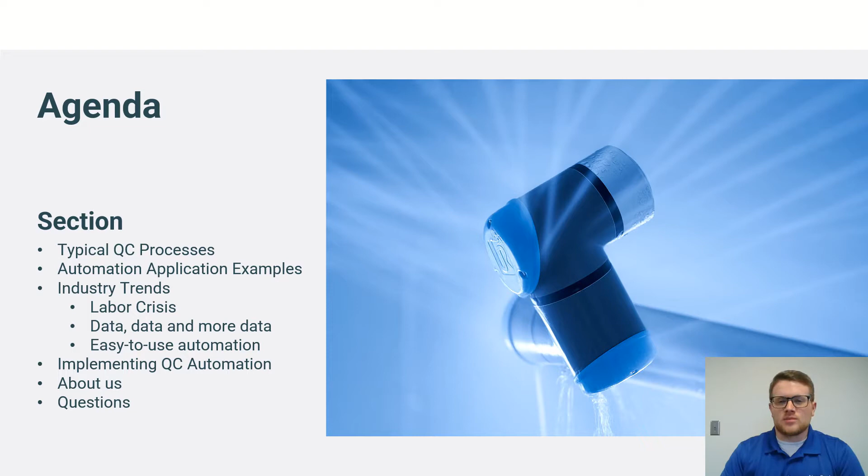So many manufacturers tend to lump quality control, which is a really critical business function, into overhead costs, and it's not often considered a starting point for automation, even though QC is full of these expensive, labor-intensive, manual, boring, and repetitive tasks that are really great candidates for automation.

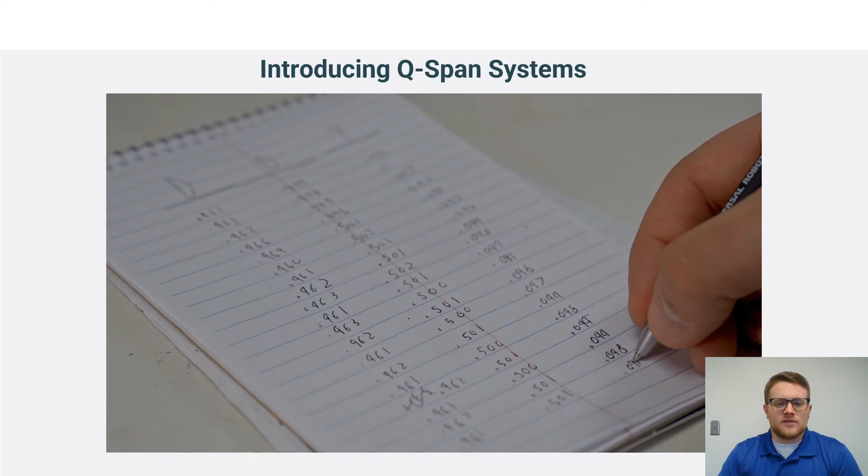Inspectors, and especially CMM programmers, are often paid much higher than many other production staff on most quality teams. And while manual tools are great for quickly checking dimensions in reference to a drawing, using them for hours on end is prone to error, could even cause repetitive stress injuries, and definitely leads to turnover because employees just don't want to sit at a bench doing this all day long.

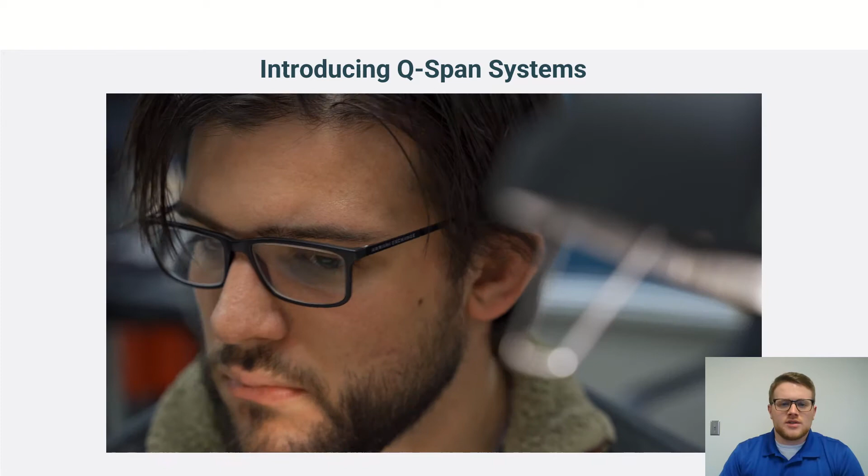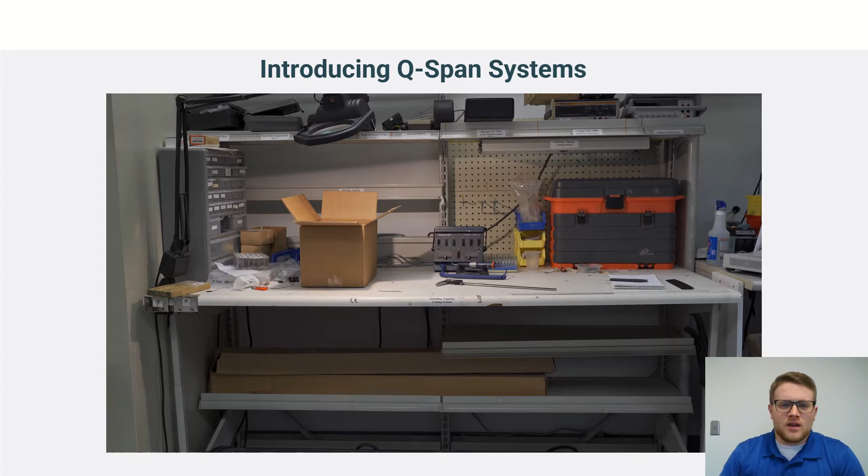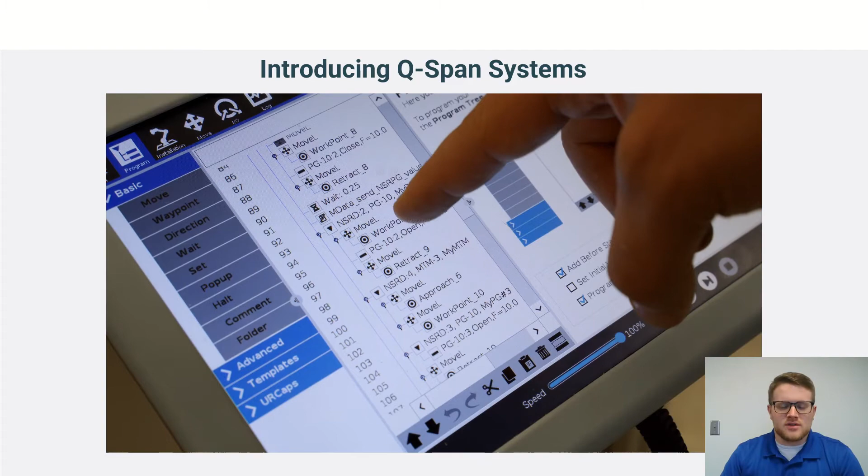So our goal was really to enable QC automation at roughly the same speed as a human operator, take up the same amount of space that a person would need to manually inspect at a bench, and eliminate data collection errors. This also helps free skilled operators to do more productive QC tasks, like more intricate and complicated inspections, maybe something like programming a CMM, or a visual-based inspection system that you might have in the metrology lab.

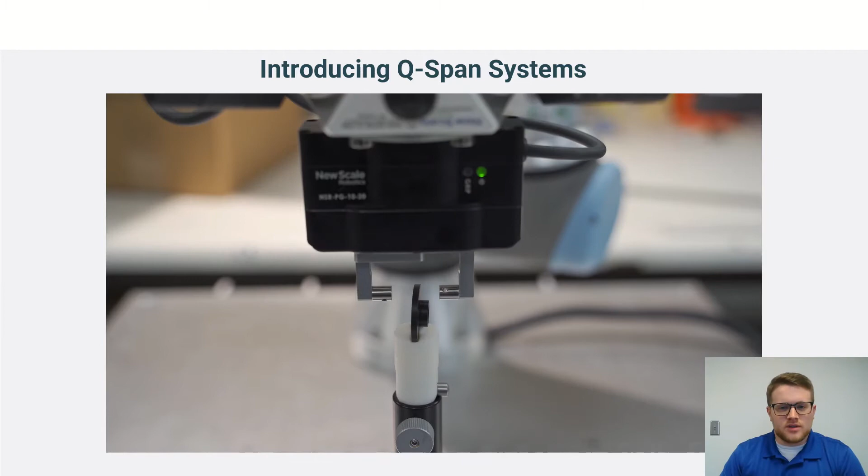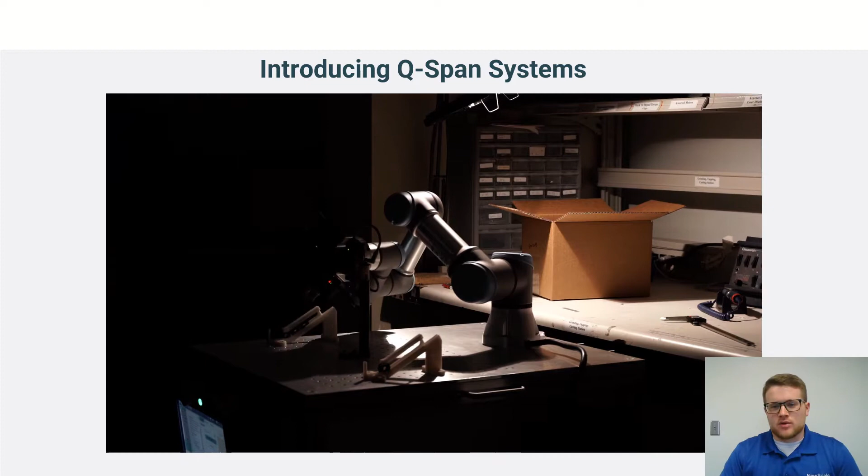The Q-Span workstation is what you'll see throughout this presentation. It uses grippers that function as robotic calipers to allow you to not just pick and place parts, but you can pick, measure, record, and place parts, allowing you to automate the type of repetitive inspection processes that we're showing in this video on screen.

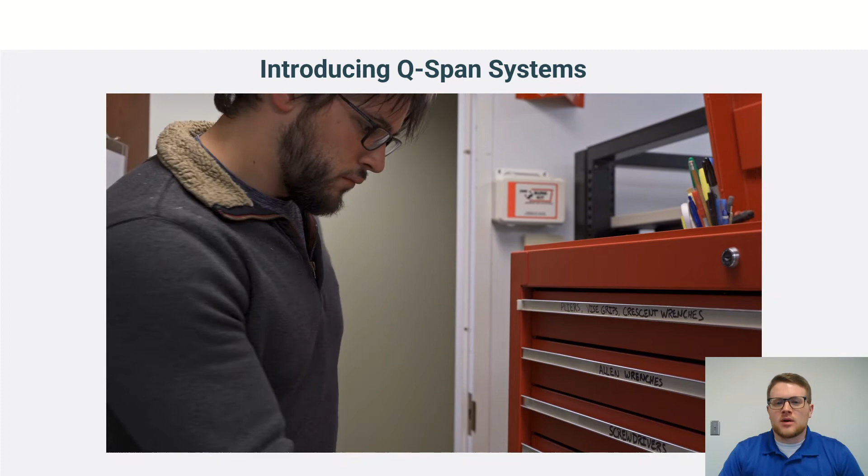During assembly processes, operators need high-quality in-spec parts to ensure that assembled parts meet mechanical fit and performance requirements. Out-of-spec parts can negatively impact your tolerance stack-up and, in turn, your assembly yields. So automating inspection and part sorting with the robot before assembly begins allows your operators to work with binned parts with known dimensions to improve assembly yield and quality, and we'll talk about that a bit more later on.

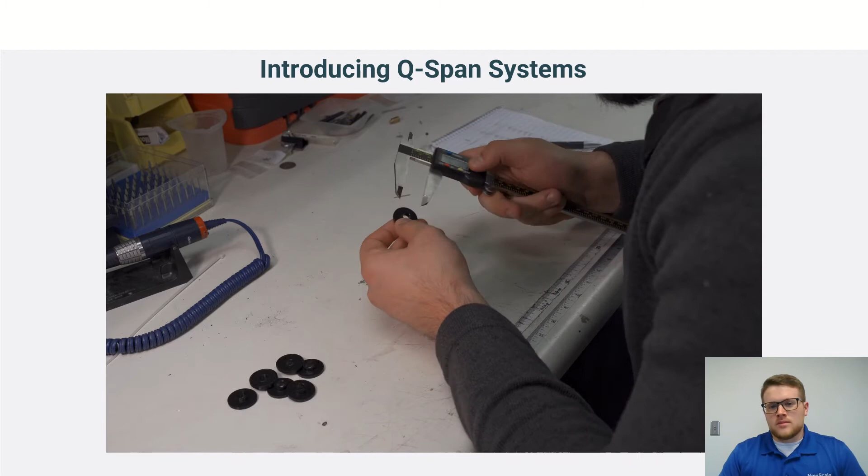The gripper's repeatability is about 2 times better than most digital calipers, and we're removing the human variation that you see from multiple operators measuring parts manually with those handheld tools.

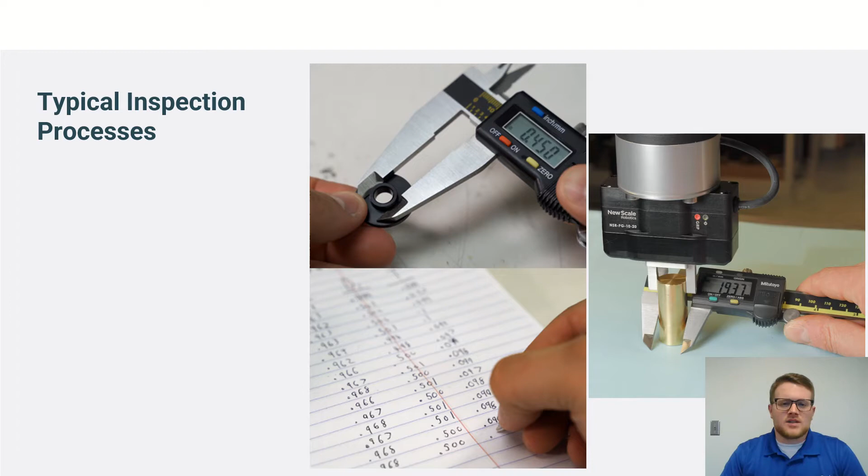Every production process needs to have some sort of quality process in place as well, because if you can't measure your process, you can't improve it, which is why the QC department is so necessary.

And traditionally, when we're inspecting and collecting dimensional data on parts, you really have 2 primary methods that you see in most production facilities. Method 1 is the parts are measured on the floor by an operator or inspector with manual tools, and this data can be recorded manually or recorded with a direct connection to your SPC software.

It's a really good way to check critical dimensions to verify that the process is producing in-spec parts, but having to use a tool for hours on end is, again, prone to error and perhaps high turnover.

Every operator measures the part somewhat differently with manual tools, and that's why you use multiple operators during a gauge R&R study. They might apply different levels of force with their hand while using the manual tool. They may grip the part in a different location or at a different angle than another operator, or they might just record the data wrong. They might have rounded incorrectly, they may have bad handwriting, or they might have just been distracted or tired.

Throughout a production day, operators are often asked to sample parts from a process, something that can often be overlooked or forgotten, or maybe even skipped entirely, as operators are required to adapt to new challenges or tasks on the production floor. These inaccurate measurements from manual tools or forgetful operators who may accidentally allow the machine to run for prolonged periods without making process adjustments can lead to failing batches of junk parts that need to be reworked or scrapped entirely, both of which are unnecessary production expenses.

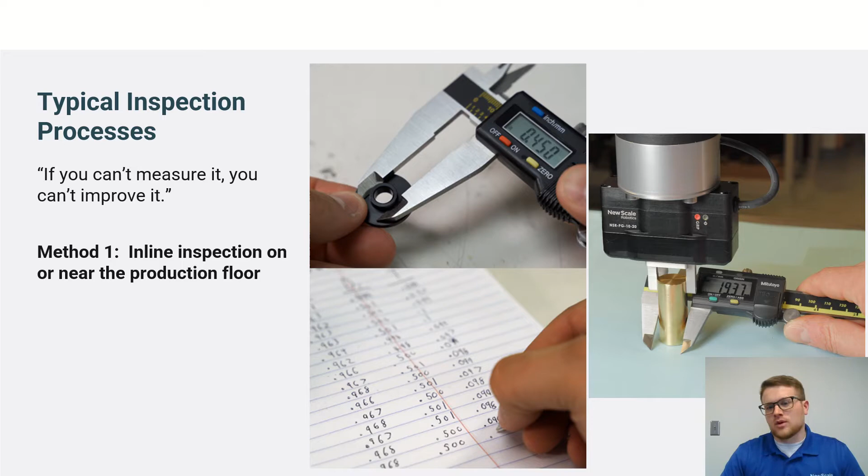This type of inspection work usually involves loading parts in and out of pre-programmed inspection cycles on these machines, which is often a boring, time-consuming, and expensive operation, falling nicely into the dull category and really making it an ideal candidate for automation.

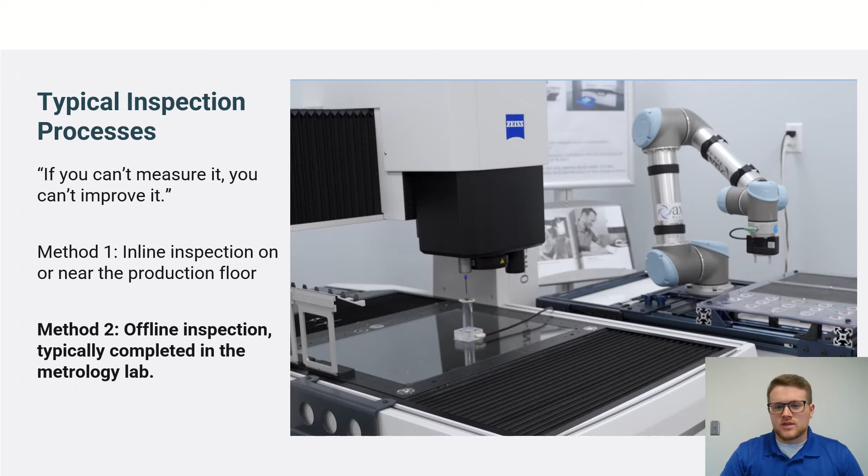These routine inspections are often performed by highly trained and well-paid inspection technicians who have considerable training time on these more advanced inspection tools, and whose time is not best spent just loading parts in and out of a machine all day, especially in an environment where manufacturers are facing a labor crisis with many open positions for skilled manufacturing staff, including quality inspectors.

Let's take a look at some real-world application examples and why QC automation is growing in importance within the marketplace.

Companies like NewScale Robotics are developing technologies that can be used to automate inline inspection, like our gripper caliper. Operators would be expected to periodically check measured dimensions to verify that parts are being produced within tolerance. So why shouldn't your cobot have this requirement as well?

Inspection is one of the most critical tasks to automate if your goal is to have a fully automated cell, especially one that can run lights out and continuously produce good parts without an operator having to tend to the QC functions of that machine.

Periodically inspecting the dimensions on parts to verify that they're being produced within tolerance helps machinists determine whether the process is performing correctly. This dimensional inspection data can really reliably provide insights into different process changes, and for example, this can indicate whether or not tooling on a machine has begun to wear based on the measured dimension.

This will require the operator to stop the process temporarily to adjust an offset, or perhaps even swap out a machine tool. I speak with a lot of manufacturers that have implemented robots for machine tending, but find that they keep producing runs of junk parts because they haven't quite solved the QC piece of their automated fabrication.

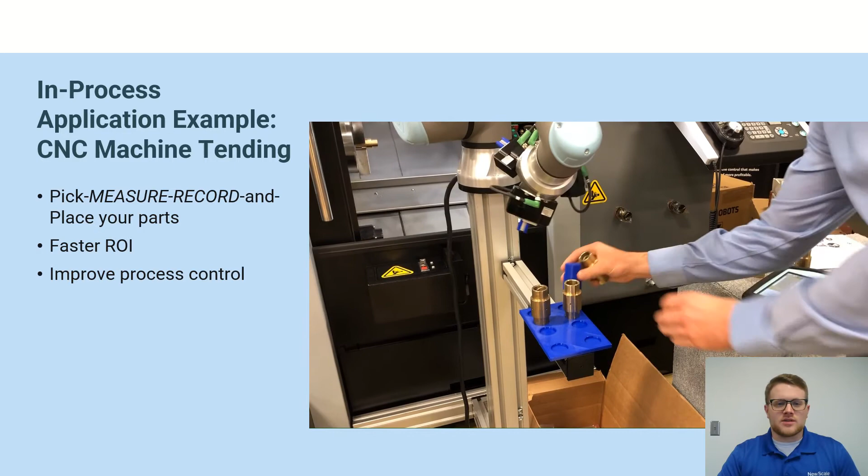Once you understand the correlation between a part tolerance's drift and the wear on a machine tool, it might also even be possible to automate those offset adjustments on your machine and enable completely lights out automation.

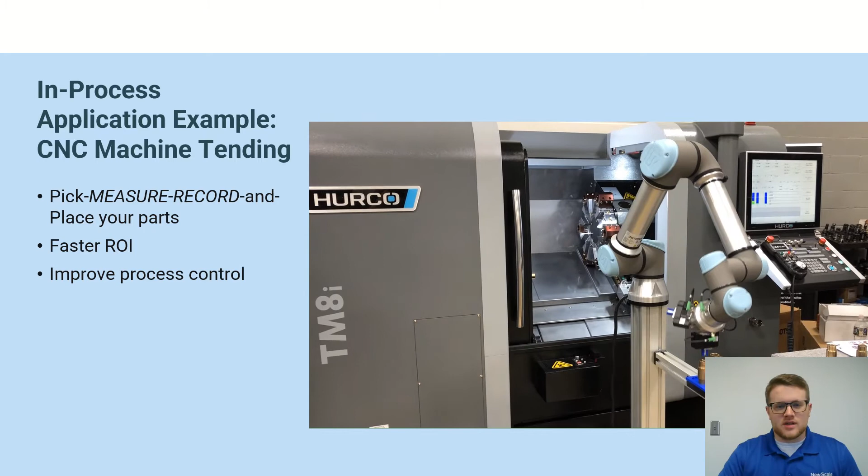This is a demo created by a UR distribution partner, ADI, where the precision gripper calipers on a UR5E pick and place parts out of this Hurco machine and place them onto an output fixture. The critical dimension here, the outside diameter, is inspected to determine if the part is within tolerance.

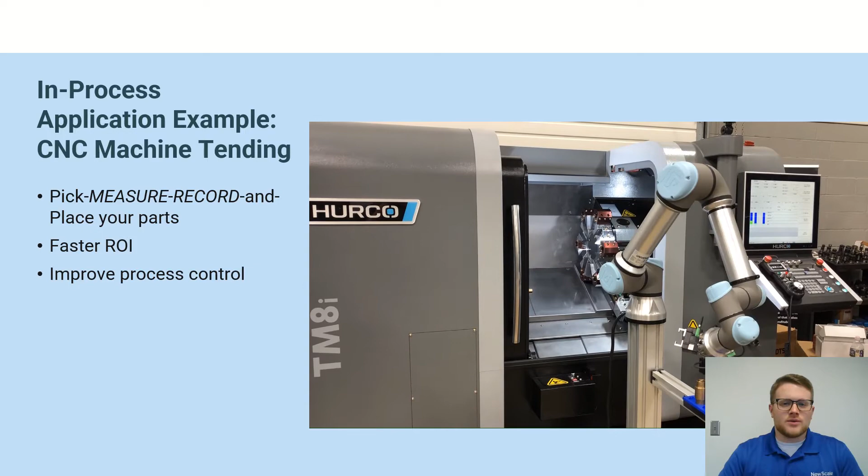Here we swapped in a 3D printed part that you just saw. It's the same exact size as that part, but it was outside of the tolerance window, so the robot made the decision in process to move the part to the fail location, in this case, into his hand.

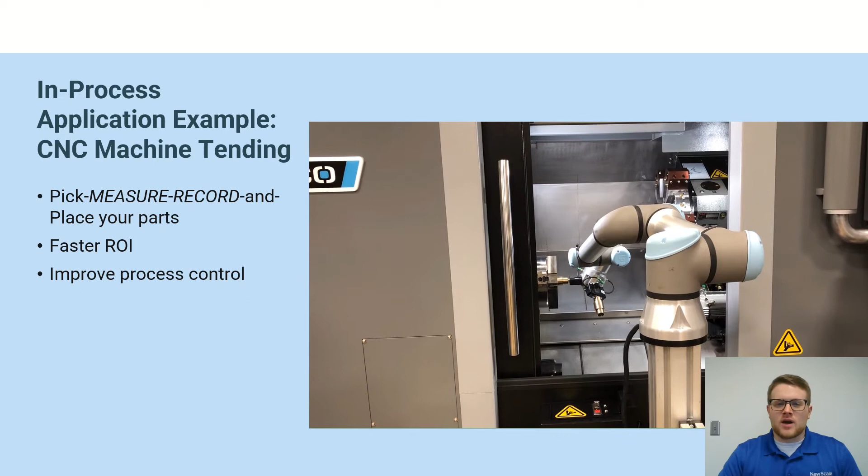This is an example of one way to use cobots for QC automation. In a production setting, the cobot could be configured to also notify an operator when a part fails and require them to inspect or perhaps service the machine before they restart it.

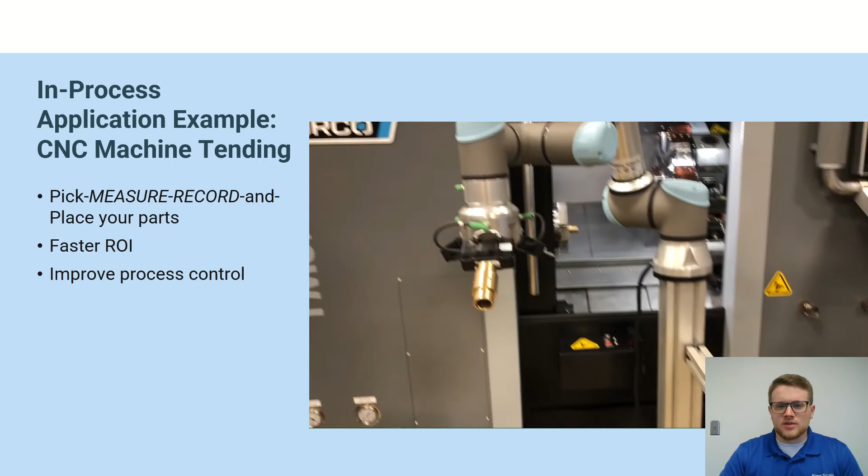In something like an injection molding setting, the same type of process can occur on molded parts to inspect some critical dimensions and help us ensure that our molds are still producing good parts.

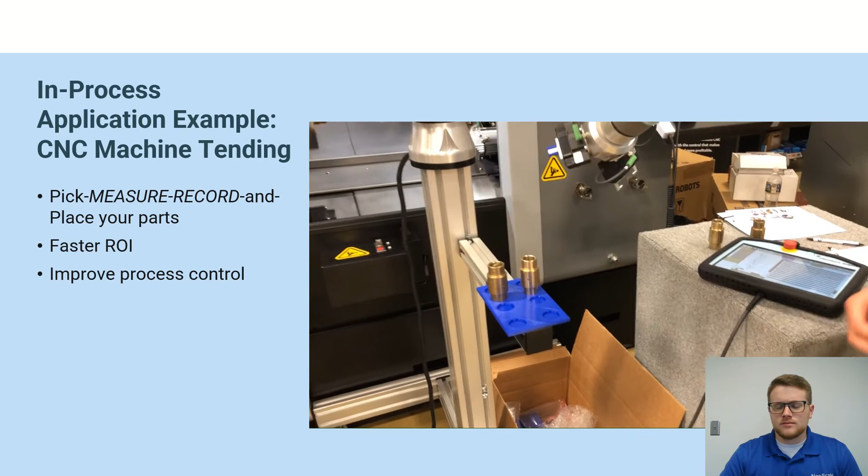In some operations where several different parts need to be assembled into a subassembly, tolerance stackups can quickly become a big problem for your yield as you try to meet your mechanical fit and performance requirements. Some assembly processes will even incorporate in-process modifications like shimming or grinding to help improve yields with the parts the operators are given. This is sometimes called a fitted assembly operation. This is not just a difficult process to control, but it also requires very skilled technicians to effectively execute and achieve your yield targets.

One way to mitigate this is by inspecting parts and placing similarly sized parts into bins. This provides operators with parts that have known dimensions within a certain tolerance window, giving them a smaller sample of parts to work with before they even start assembling. The end result is that you can improve yields by reducing the need to rework parts that don't quite fit during an assembly process.

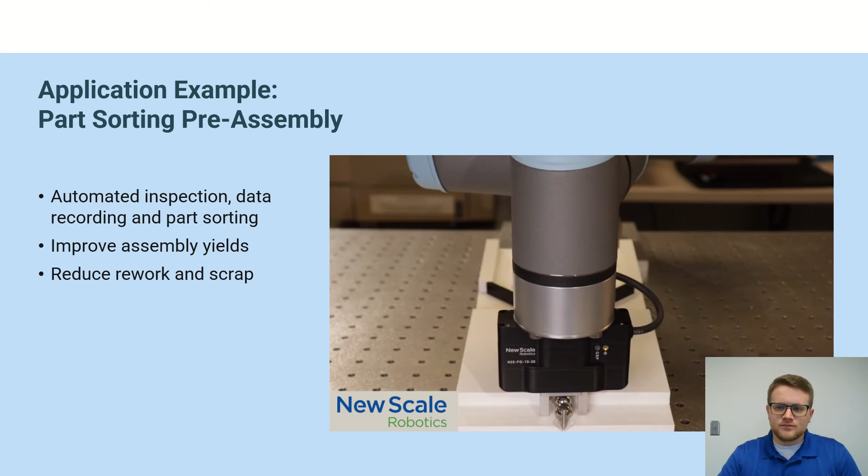In this application, our customer OptiPro Systems used a UR3E cobot with a precision gripper caliper to inspect the dimensions on a large stack of cored lens blanks. This production involves large stacks of laminated glass that are bored out, producing several batches of these lens cores at one time. That requires that an input tray be loaded into the cobot workstation, which is different than the single part feed we saw in some of the previous slides.

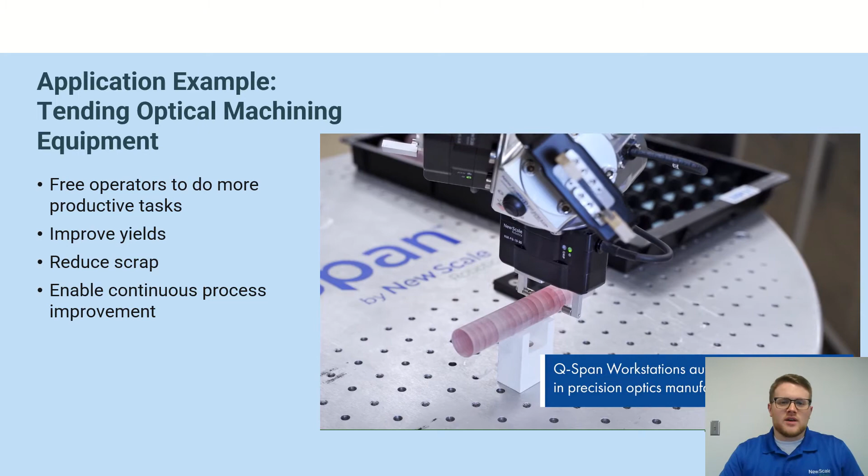Using a tray allows you to load your tray, hit play, and then walk away from the inspection system, which can really free your operators to do other tasks during the inspection cycle after a very simple input. The cobot can place these parts into fail bins or trays and will generate automatic inspection reports that can be used to improve your process on the next run, helping you improve yields, reduce scrap, and eliminate the need to have your staff stand there and inspect all those parts.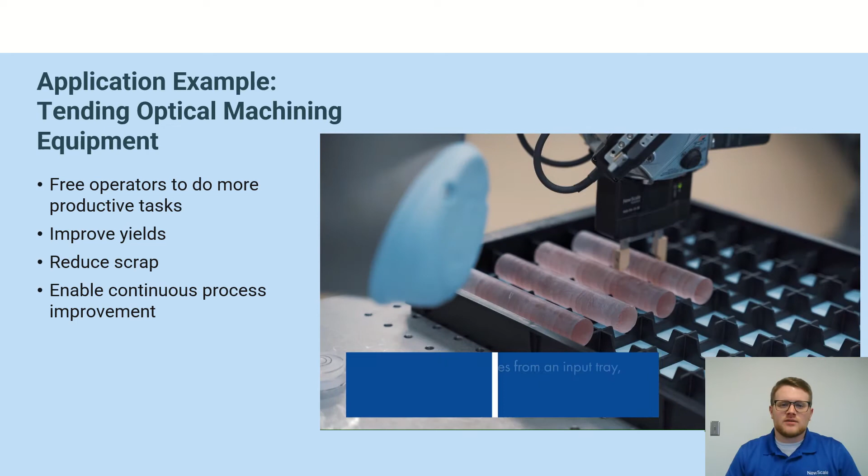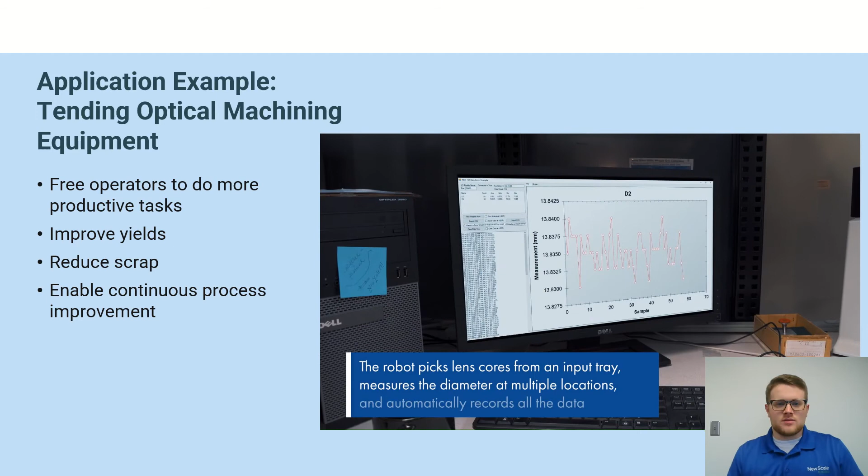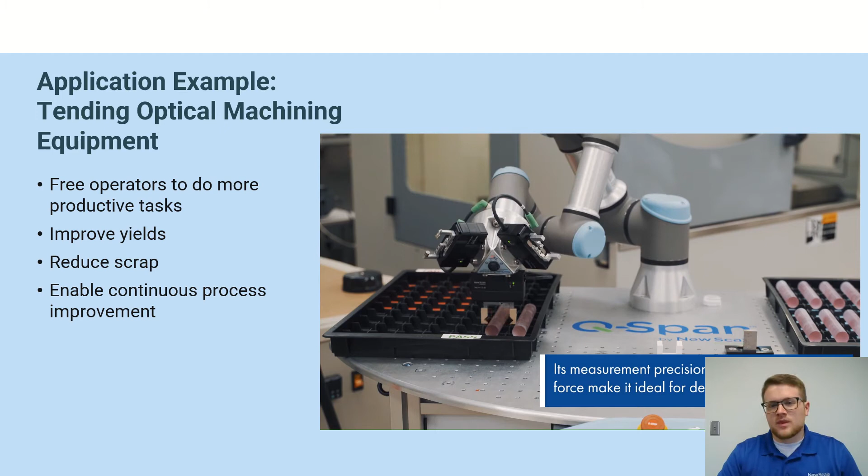During the optical fabrication process, regular quality control checks are required to ensure that parts are being cut and ground within tolerance. This can occur at early stages of the fabrication process, such as the production of these lens cores, or later in the process as those blanks are cut, ground, and polished into precision optics, some of which will end up going into lens assemblies. This can also be true for many precision metal part fabricators as well.

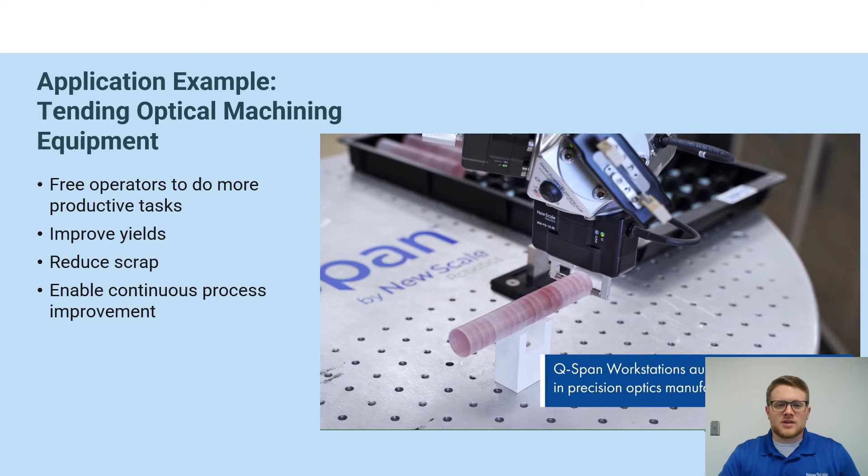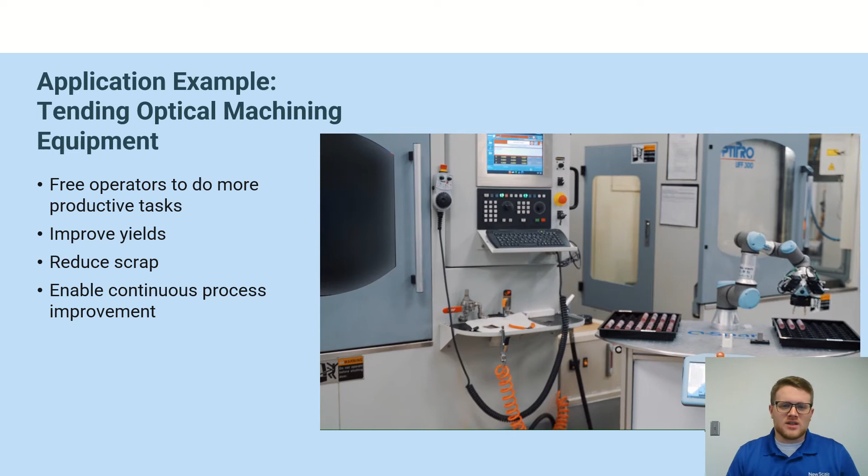The flexibility of collaborative robots allows you to load many different part types onto one workstation and inspect high mixes of parts. Once an initial inspection program is set up with a cobot, redeployment for other tasks really only takes minutes. This can empower your staff to automate any routine inspection process on your floor and handle many different batches of parts within one production shift.

Many manufacturers that we speak with are dedicating more inspection work to their quality labs to meet the industry's growing demand for stricter QC requirements and more data. This can often lead to bottlenecks within their QC labs that are really unnecessary and expensive. There's really a big opportunity cost for dedicating your valuable inspection equipment to high volume routine inspections, which can back up your entire production line.

This is an example on screen of what I would classify as a non-traditional collaborative robot application. No parts are actually being fabricated by the machine that we're working with here, but you still gain the value of freeing your CMM programmer from having to babysit this machine and load parts in and out all day long.

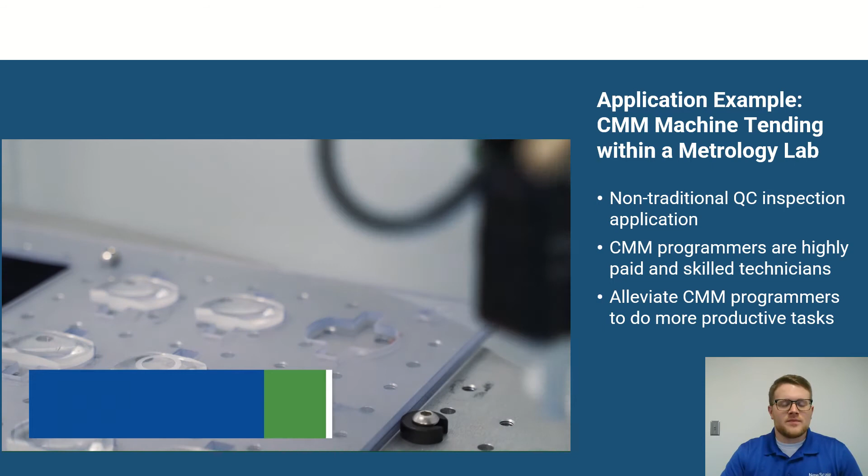It's a really expensive operation for a skilled technician that's often paid anywhere from $25 to $30 per hour. And the cost for implementing this type of application is really comparable to the annual total cost of 1 to 2 full-time CMM programmers. There's an application preview on screen, and the full video is on our website if anyone is interested in learning more about this case study.

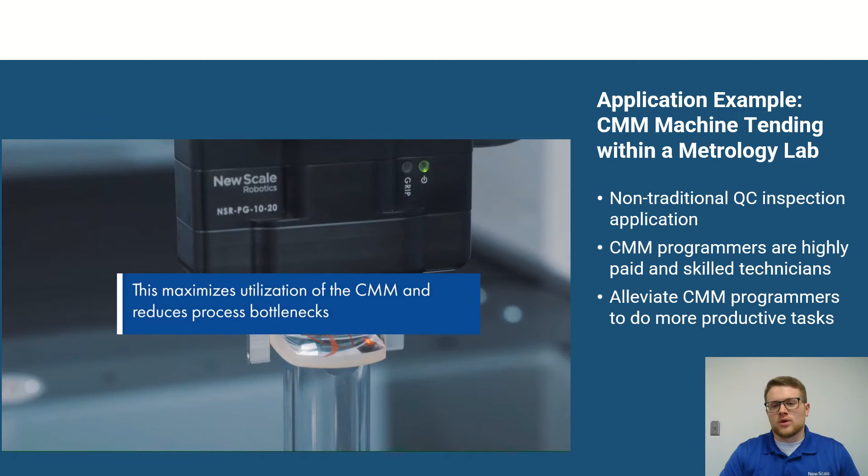In this application, our customer, OptiPro Systems, redeployed our Q-span gripper caliper to measure and perform a pre-check on the width and OD of precision optics before the lenses were loaded into the CMM. The measured dimension on the part triggers a specific CMM inspection program based on the measurement identified before loading.

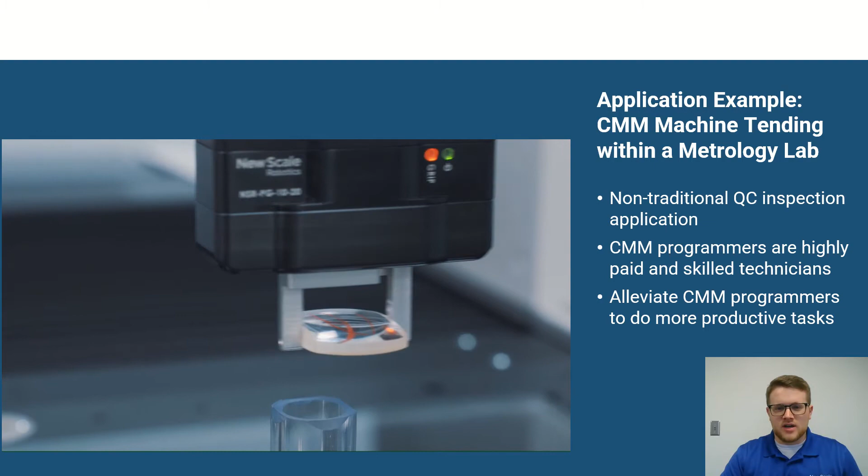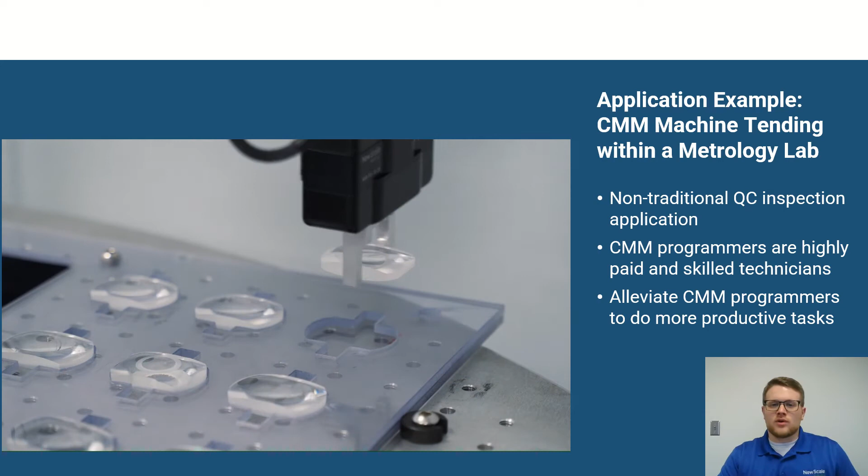For example, if we picked up a part and identified the dimension as 10 millimeters, we'd know we have part A, triggering program A to initiate on the CMM after the part is loaded. If we picked a lens with a dimension of 10.5 millimeters, we'd know we have part B, triggering program B to run on the CMM after the part is loaded into the fixture.

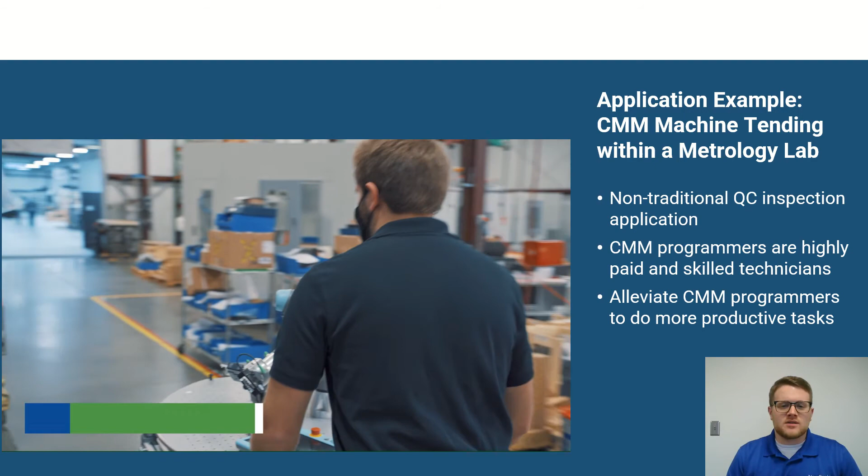You also get the added benefits of using inspection application kits for this type of process, where we can pre-inspect parts to provide cost savings and maximize the uptime of your CMM if it's acceptable to pre-fail bad parts and add in decision making to exclude them from your CMM inspection program.

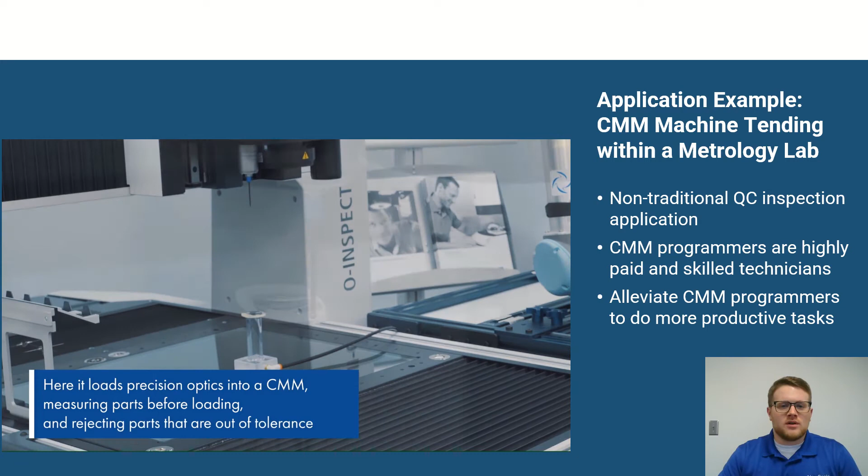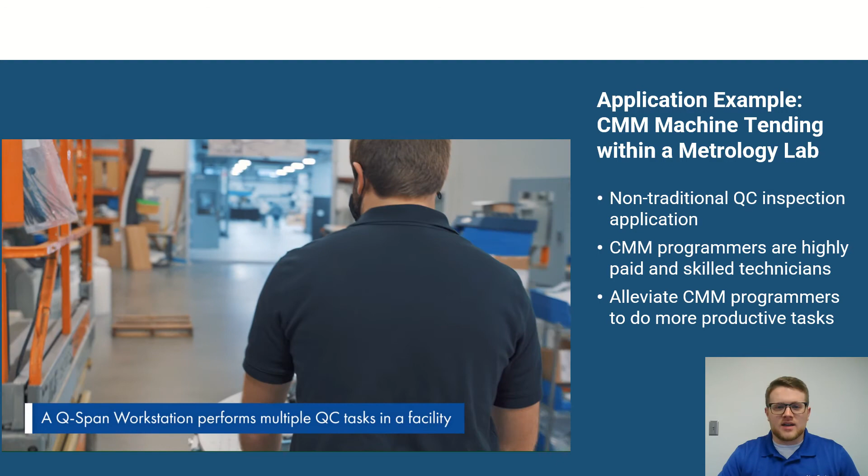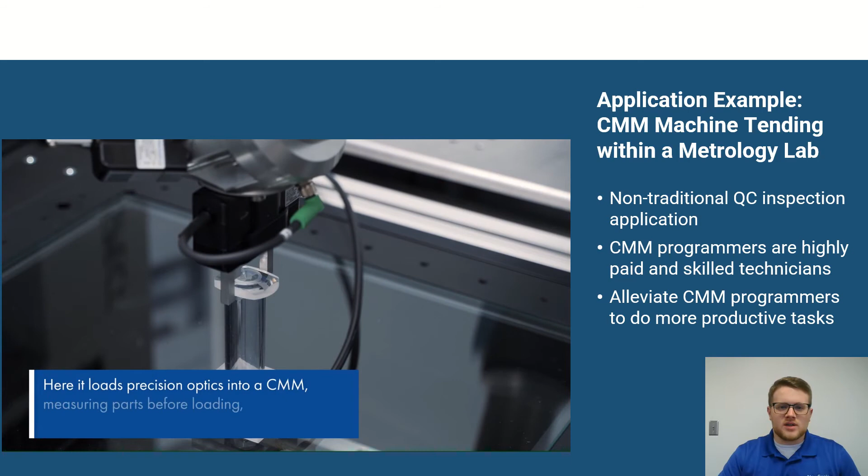For example, if it takes 5 minutes to inspect one part with a CMM, we could pre-inspect critical dimensions on the next part on deck while the CMM is running on another part. If we determine a critical dimension is failing, such as a diameter or part thickness, we can pre-fail that part and never place it into the CMM, saving 5 minutes and allowing other parts to be inspected instead.

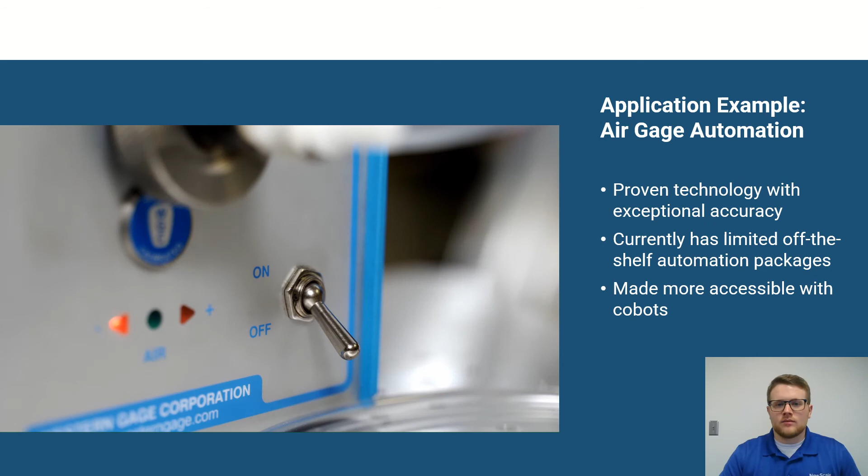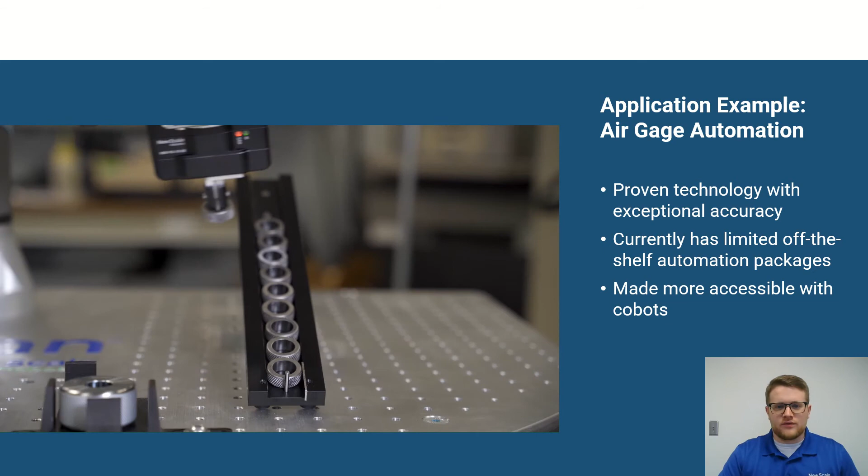Here's another non-traditional collaborative robot QC inspection application. This video shows how a cobot can automate air gauge measurements. Air gauges are an extremely accurate and reliable technology for making fast part measurements with micro-inch precision.

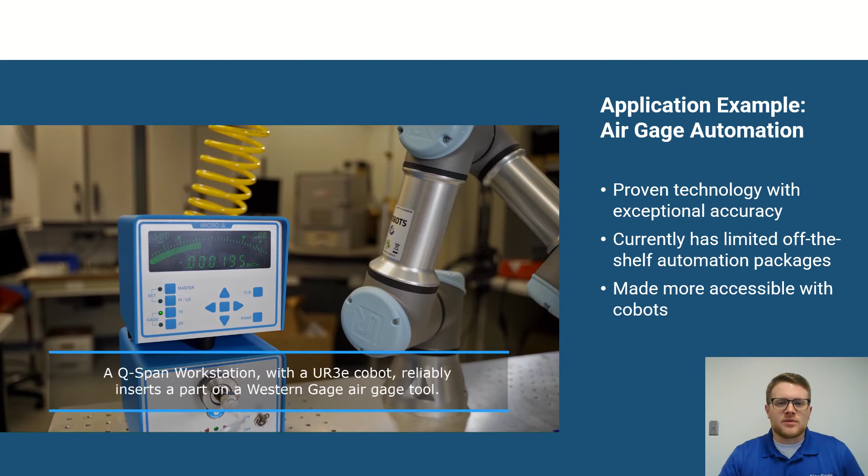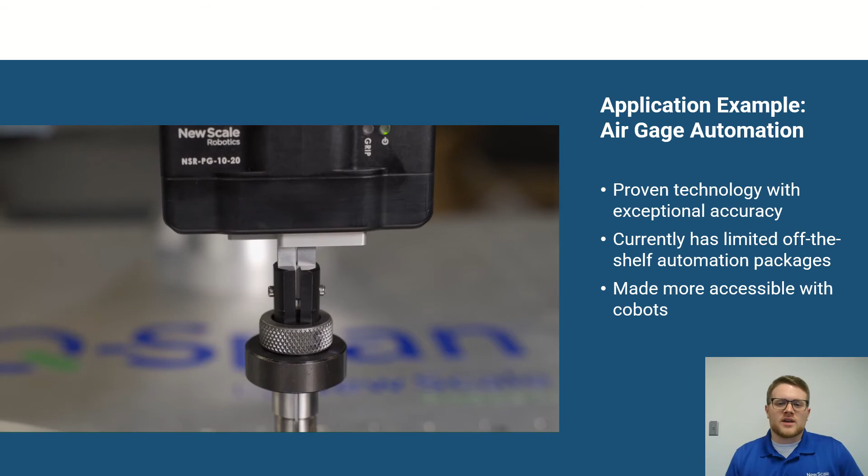Many of you supporting industries like aerospace, automotive, or medical customers are likely familiar with this type of technology and its high-end capabilities. They generally require part loading with very tight clearances, and this video demonstrates how an older technology like air gauges can really benefit from the automation capabilities of collaborative robots.

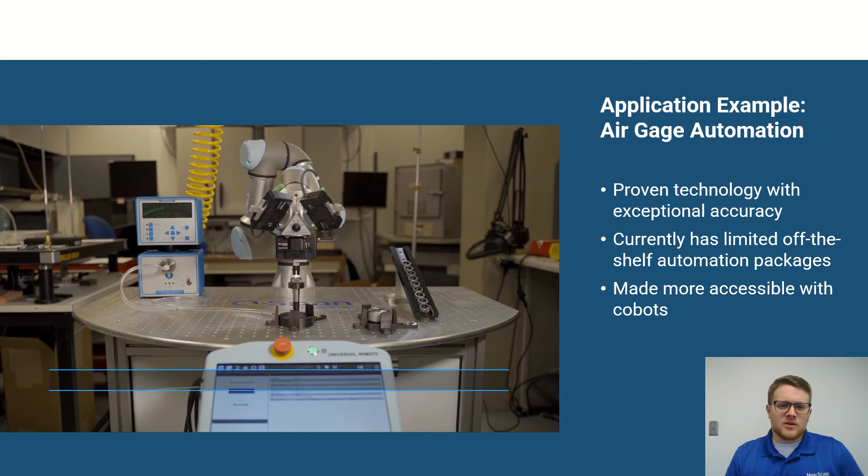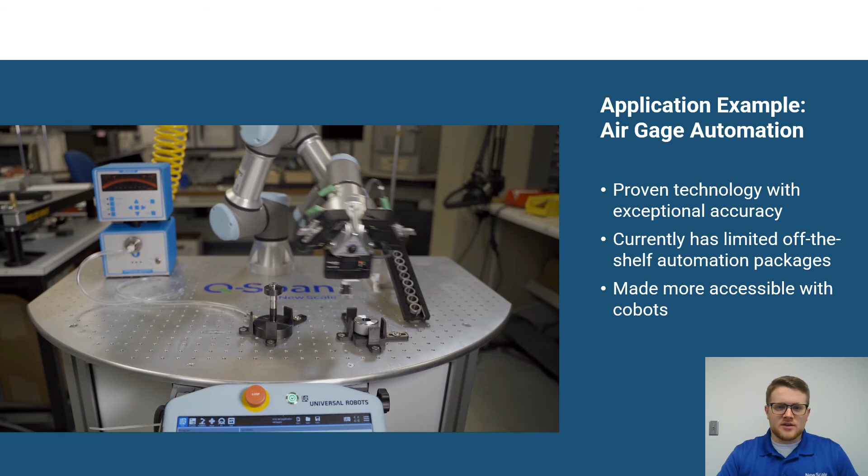This application demonstrates how the Q-span gripper caliper can work in tandem with other machines to automate part picking and placement with inspection to meet extreme high precision inspection requirements. New technologies also offer the ability to communicate with air gauges to extract all the measurement values and catalog them for analysis by our QC team, allowing for better traceability and accuracy of data collection.

So why is all this important, and how does it relate to industry trends we're seeing in manufacturing? We'll talk about a few trends and current challenges in manufacturing. Most of these challenges and trends are really interrelated, and I think they're all important to think about. The first trend is the labor crisis and the lack of available labor in manufacturing.

I'm sure many of you have experienced the impact from the labor crisis and the challenges associated with attracting and retaining staff, which for many manufacturers has been compounded by the COVID pandemic. Many manufacturers actually cite this as their number one business priority as they move forward over the next several years.

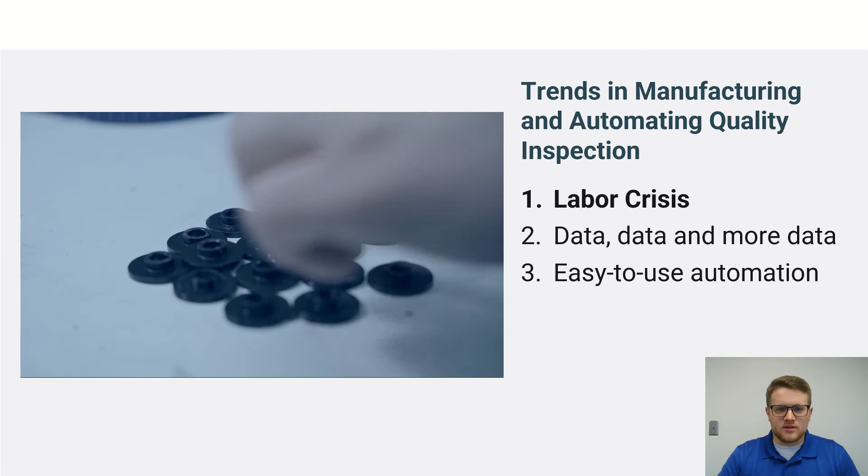There's a lot of data on these trends, and with an aging workforce, manufacturers are losing a large knowledge base as skilled employees with 40 plus years of experience are retiring faster than new employees are entering the workforce. As I mentioned earlier, QC is often not considered a starting point for automation, even though it's full of repetitive tasks that are great candidates for it.

Labor is often the biggest overhead cost in a quality department, and why is that? It's really because quality is a critical function within an organization, and you need skilled and highly trained operators to help you do the job well.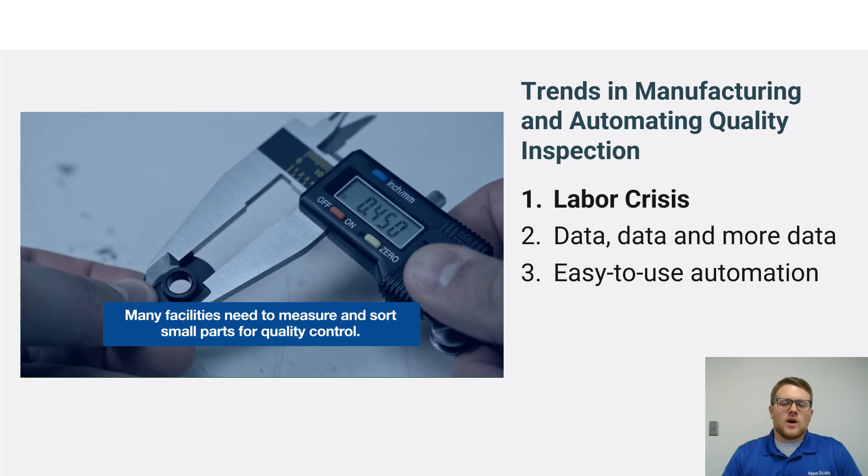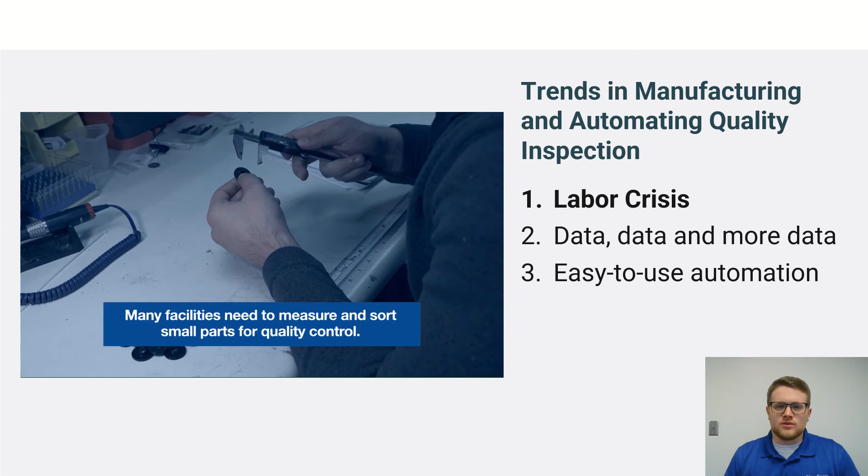Most QC processes are also manual, which further leads to those high overhead costs. In quality departments, CMM and other skilled QC programmers are often in short supply for many quality departments and metrology labs, so a lot of manufacturers hope to automate functions of their job to maximize their time programming and optimizing inspection processes.

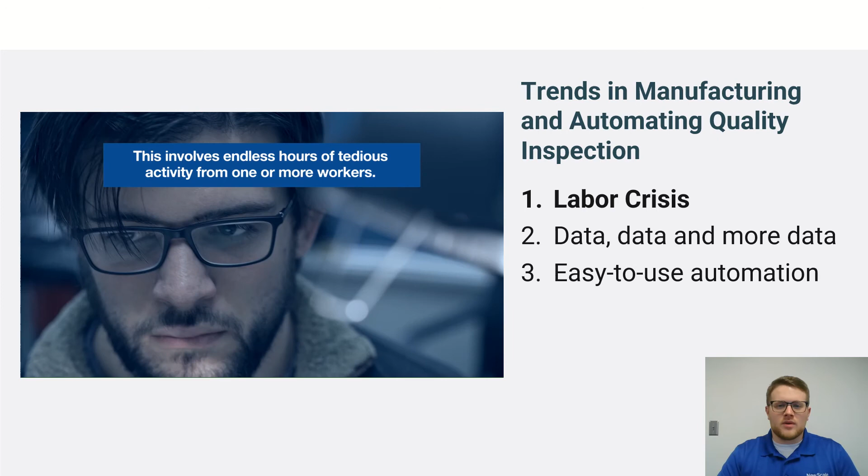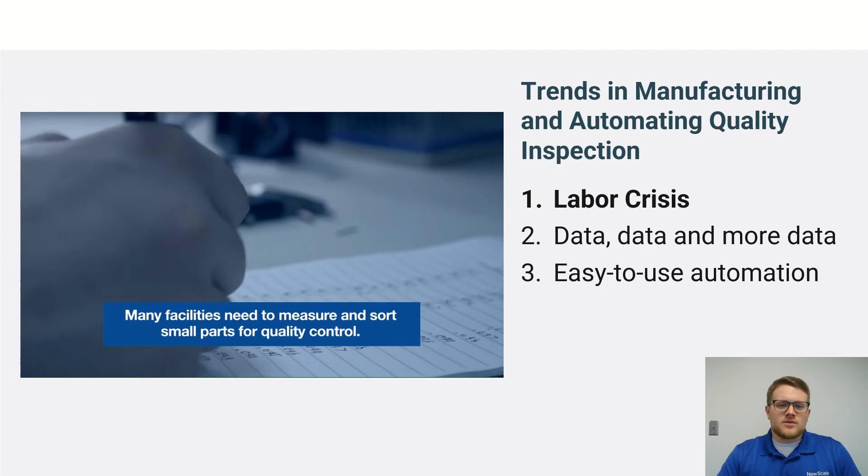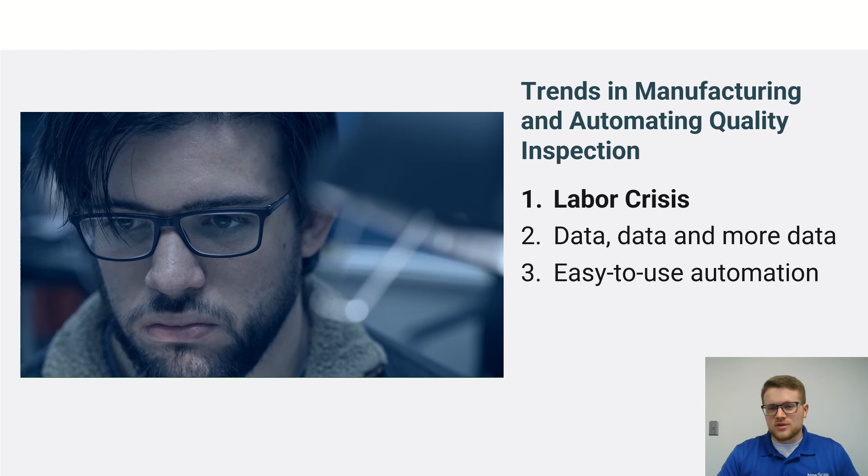On the production floor, manual inspectors are often hard to come by and/or hard to retain for the often dull and repetitive tasks of measuring baskets or boxes of parts day in and day out. I speak with many manufacturers that solely justify their investment in automation because they need to reduce turnover in their quality department by automating their worst QC tasks that are the most boring and tedious.

The second industry trend that I'm seeing is the desire to collect more data. There's really a huge demand in the manufacturing industry to collect data in every aspect of a production process, especially quality control. More data lets you make better decisions and improve your production processes. However, in spite of that trend, a recent article I read in Quality Magazine cited that Infinity QS spoke with 260 manufacturers about data collection, and found that 75% of those surveyed are still collecting data manually, and 47% still rely on pencil and paper, which I thought was pretty unbelievable considering the levels of buzz around Industry 4.0 and data collection these days.

Data and data integrity is also very important, especially in regulated industries. So using robotics to help you automatically record and store this data should help you improve the accuracy of data collection, reduce the likelihood of falsified data, and also help you avoid non-conforming inspection ratings. We're seeing many manufacturers recognize the benefits of digitalizing their data and are searching for solutions to interface all of their measurement data for analysis within a single software program whenever that's possible.

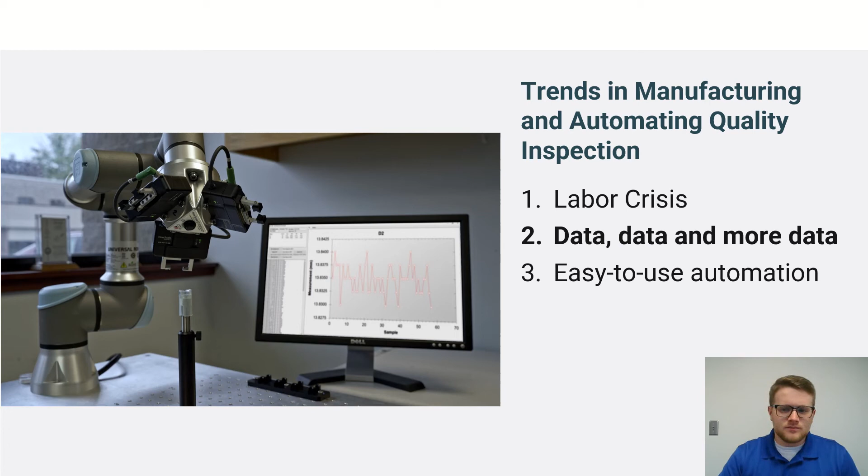The third trend that I see frequently is the desire for easier to use automation and quality control technologies. While automation is seen as a way to fulfill the skilled labor gap, it's also seen as a way to attract and retain workers. Employees really want to feel that their employers are on the cutting edge of technology and using that technology to their advantage. It really shows employees and their customers that their company is working to improve its business with new technology and is strategically positioned to succeed in the market with those technologies and with that staff.

There's also a strong desire towards the integration of safe-for-human technologies like cobots, autonomous mobile robots, and smart conveyors in our factories that will keep workers safe and nowadays also socially distanced.

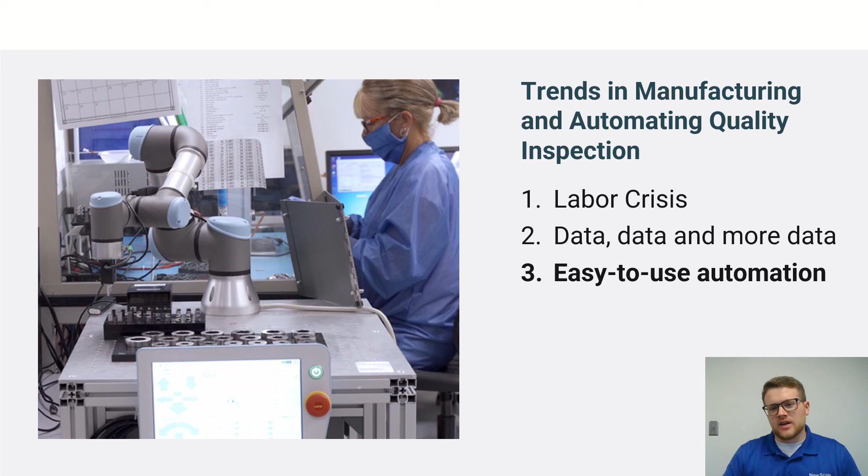We're seeing a lot of bottlenecks identified in quality departments, especially in metrology labs, and most companies, particularly those with limited automation experience, really want to see what we call the application of automation, as well as inspection systems, meaning that these technologies need to be easier to use, easier to learn, teach, and adapt, just like the apps on our smartphones. Universal Robots and strategic partners like New Scale have worked on the cutting edge of easy-to-use automation to empower companies to use these robots and automation systems as tools that their staff can use to automate quickly and strategically for a lot of different types of applications.

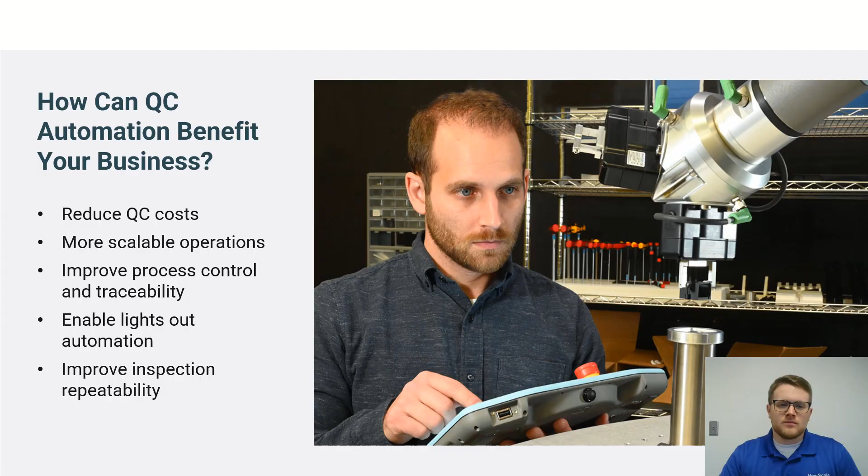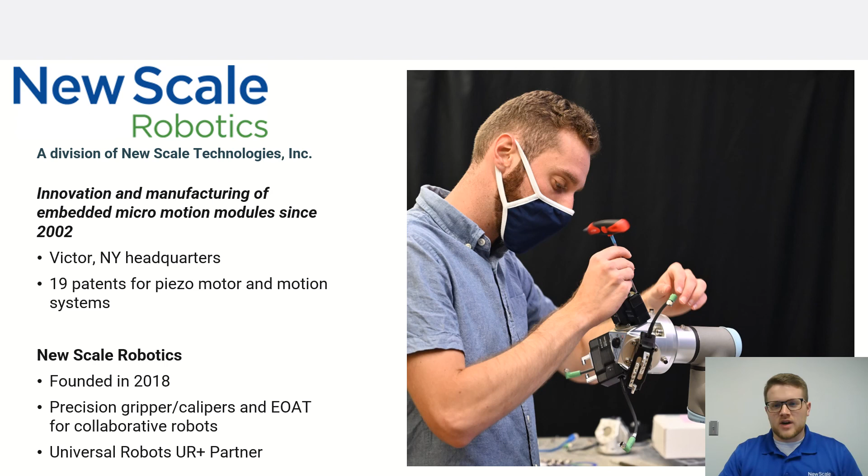We're really experts at merging metrology with cobots, and we're actually the only UR+ partner that has a UR+ certified application kit for quality inspection. We are also a certified systems integrator for Universal Robots, which allows us to directly support customers for their robotics and metrology needs. If you'd like to learn more about our company, I encourage you to visit our booth at the Cobot Expo, or you can stop by our website at newscalerobotics.com.